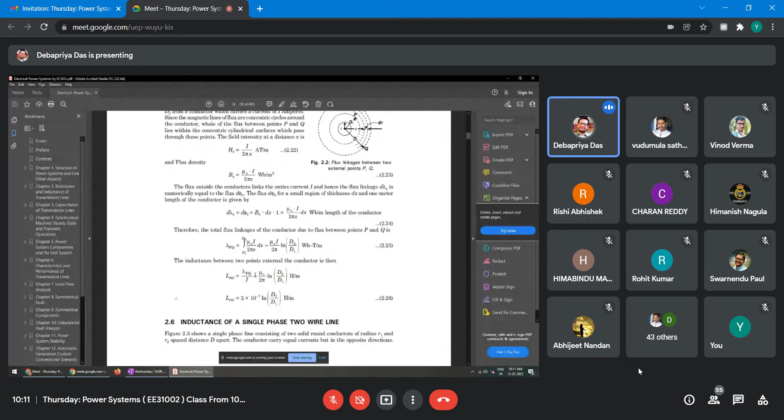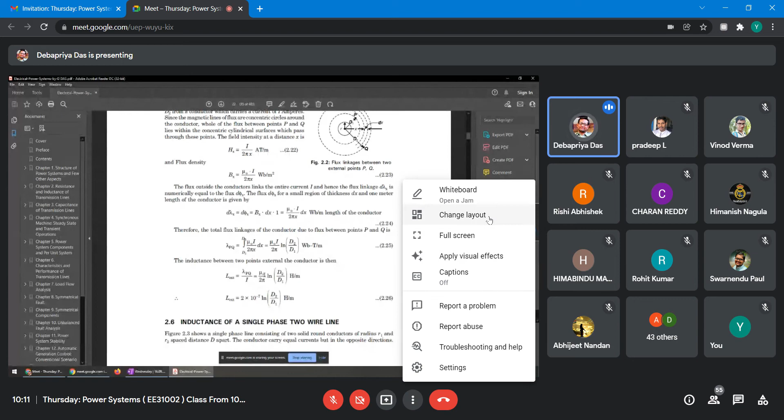Therefore, L external will be lambda PQ upon I. That will be mu 0 by 2 pi ln D2 upon D1 Henry per meter. If you put mu 0 value, 4 pi into 10 to the power minus 7 Henry per meter, then L external will be 2 into 10 to the power minus 7 ln D2 by D1 Henry per meter. So this is internal to the conductor, and this is external to the conductor.

But in this case, it depends on the distance D1 and D2. For example, if D2 is equal to D and D1 is equal to r, from the surface of the conductor, then this will become 2 into 10 to the power minus 7 ln D upon r Henry per meter, right?

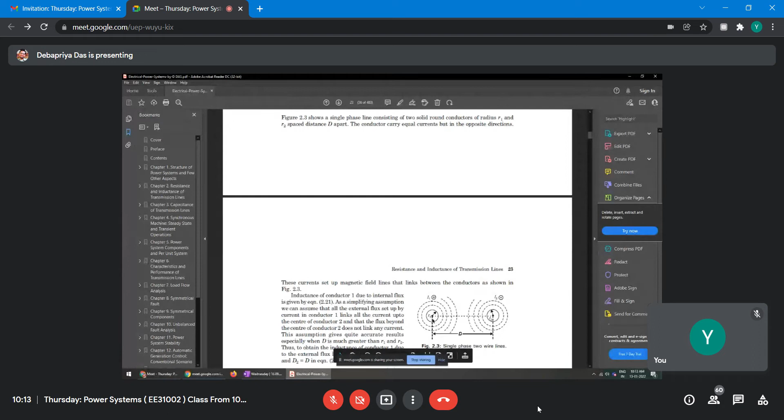So suppose you have two conductors, single phase. One is incoming, another is outgoing. This plus means the current is entering into the page, and dot means it is leaving the page. Assume that this current is I1 and this current is I2, although I1 is equal to minus I2 according to the direction, and assume the radius of this conductor is R1 and radius of this conductor is R2.

So the conductors carry equal currents but in opposite direction. So basically I1 will be minus I2 because it is a return path. If one is I1, then I2 is equal to minus I1. Now this current sets up magnetic field lines that link between the conductors as shown.

So inductance of conductor 1 due to internal flux is given by equation 2.21, that is half into 10 to the power minus 7 Henry per meter. But as a simplifying assumption, we can assume that all the external flux set up by current in conductor 1 links all the current up to the center of conductor 2.

Whatever is there, we will consider only up to the center of the conductor, not beyond that, because it is a fair assumption. If you consider beyond that, you will not get much improvement in the result, but the derivation will become different. Therefore we will consider up to the center of this conductor. Similarly, for this one, we will consider up to the center of this one, and this gives quite accurate results.

Another thing is that the center to center distance is d. So d minus r1 is approximately equal to d. Similarly, d minus r2 will be approximately equal to d, because d is much larger than r, the radius of the conductor. Therefore, if we assume d1 is equal to r and d2 is equal to d in this equation, then L1 will be 2 into 10 to the power minus 7 ln d upon r1 Henry per meter.

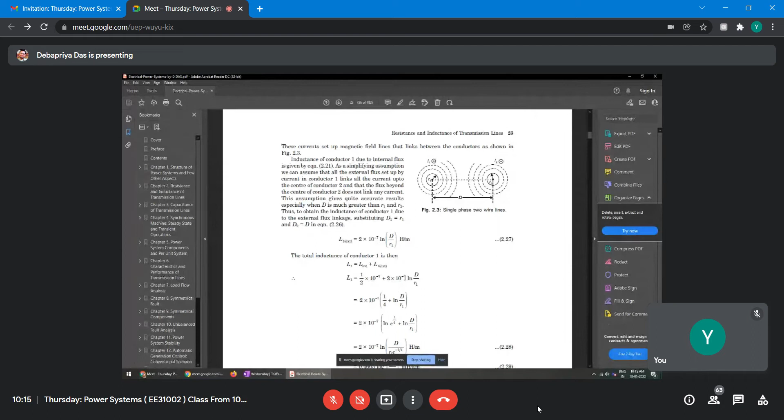Therefore, the total inductance of conductor 1 is given by the internal inductance plus the external inductance L1. Internal is half into 10 to the power minus 7, and external is 2 into 10 to the power minus 7 ln d upon r1. If you simplify, taking 2 into 10 to the power minus 7 common, in bracket it will be 1 upon 4 plus ln d upon r1. This term you can write as ln e to the power 1 upon 4 plus ln d upon r1. That means you can write 2 into 10 to the power minus 7 ln d upon r1 e to the power minus 1 upon 4 Henry per meter.

From natural log, we are converting into log base 10. Throughout this, we will use log base 10. If you convert this, you can easily do it: 0.4605 log d upon r1 dash millihenry per kilometer. Therefore, r1 dash is equal to r1 into e to the power minus 1 upon 4, that is 0.7788 r1.

So the radius r1 dash is the radius of a fictitious conductor, which has no internal inductance but has the same total inductance as the actual conductor. Therefore, when you solve numericals for calculation of inductance, if radius r is given, you will take r dash equal to 0.7788 r as the fictitious radius of the conductor, as if it has no internal inductance, but the inductance it gives includes the internal inductance. In general, r dash is equal to 0.7788 r. Similarly, for L2 it will be the same thing.

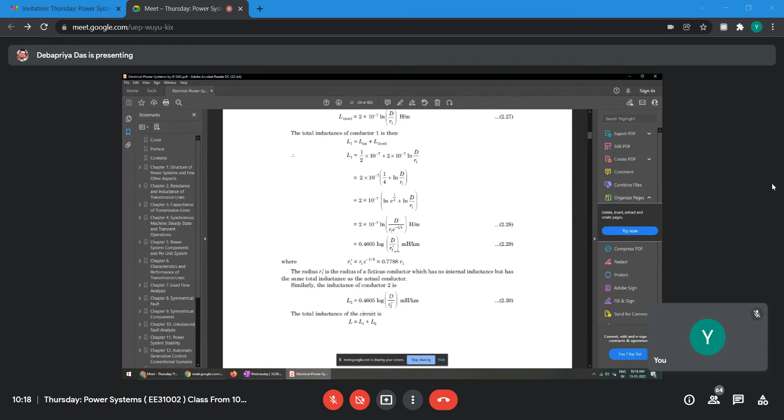So we can write L1 is equal to 0.4605 log D upon R1 dash. If the radius is the same, R1 dash is equal to R dash. So we can write L1 is equal to 0.4605 log D upon R dash. We are assuming R1 is equal to R2 is equal to R, hence R1 dash is equal to R2 dash is equal to R dash.

So this you can write as 0.4605 log 1 upon R dash plus 0.4605 log D upon 1. That means this is the inductance calculation from the radius R to 1 meter length from the center of the conductor, and this one from 1 meter to a distance D. This way these two terms have been broken, right? So this way this term, L1, is written.

Right. So from the equation it is clear that the first term is only a function of the fictitious radius of the conductor. The first term of the equation can be defined as the inductance due to both the internal flux and that external to conductor 1 up to radius 1 meter. It is 1 to R dash, meaning this one is 1 meter, right? The second term is dependent only upon the conductor spacing, and this is known as the inductance spacing factor. Instead of a single term, we have written these two terms, right?

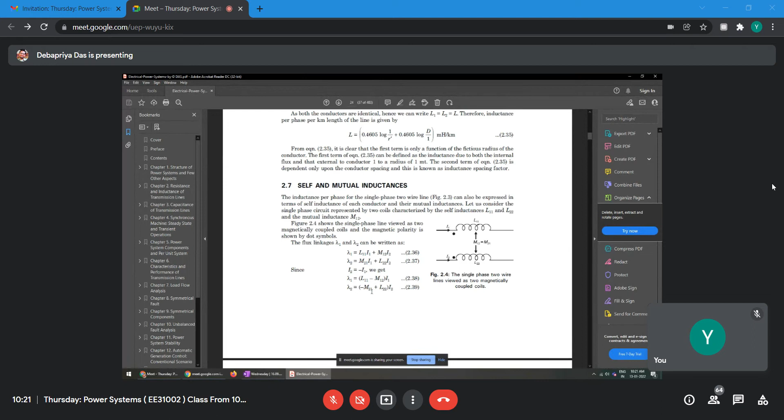so plus M12 I2. Similarly, lambda 2 is equal to L22 I2 plus M21 I1, right. Now, this current is going in and this is actually out, so I1 will be equal to minus I2. If you substitute, then lambda 1 will be L11 minus M12 times I1 and lambda 2 will be minus M21 plus L22 times I2. So one is self, another is mutual. Therefore we can write L1 will be equal to L11 minus M12 and L2 will be L22 minus M21.

Now compare equations 40 and 41 with 33 and 34. Then you will get L11 is equal to L22 is equal to 0.4605 log 1 upon R dash millihenry per kilometer, and M12 is equal to M21 is equal to 0.4605 log 1 upon D. Because here it is D upon 1, but a minus sign is there. That's why it is 1 upon D, right? So this is actually mutual inductance and this is actually self inductance, right?

The above described approach of self and mutual inductance can be extended to a group of conductors. When I was writing the book, in common textbooks you may not find this kind of expression. But after searching several books, I have cited those references at the end of this book. I saw this explanation is much better than any other textbook available, right? Because if you know only one formula, you can write everything. You will see that.

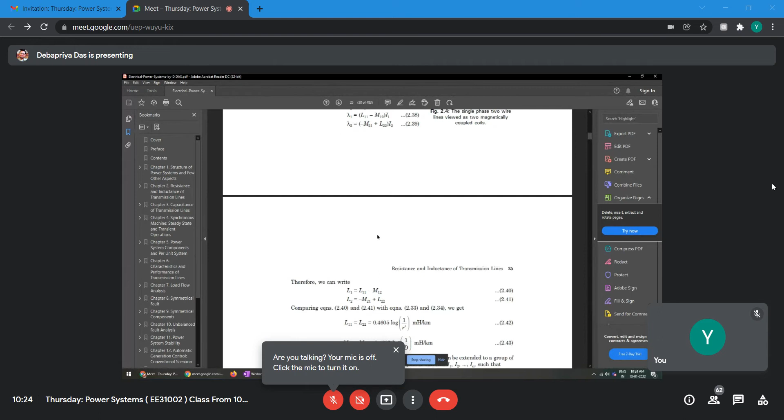In general, when we write, lambda I, that is the flux linkage of conductor I, is given by LII plus sigma j equals 1 to n, j not equal to I, Mij Ij. So this you should always keep in mind. Later when I take a three-phase circuit, those equations will be written from this one only, nothing else.

So the generalized formula for the flux linkage of a conductor can be given as lambda; we chose two conductors, but in general it will be LII plus sigma j equals 1 to n Mij Ij, j not equal to I, or whatever equations we have seen for flux linkages. Whatever you have seen here, inductance L1, L2, everything. L1 we have got this one. This is considering one conductor. This is another conductor.

But when you take the generalized flux linkages, if you consider only two conductors, you can do it and see the formula. So the flux linkages of conductor I, you can write 0.4605 II log 1 upon Ri dash plus sigma j equals 1 to n, j not equal to I, Ij log 1 upon Dij milliweber turns per kilometer. In this expression, this is actually L1 L2. But lambda is equal to LI, you know.

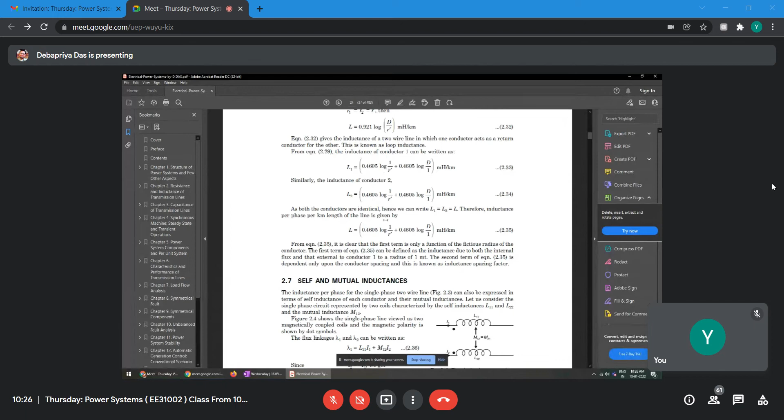So here only two terms, but for the ith conductor, flux linkages will be lambda I equals 0.4605 in bracket II log 1 upon Ri dash plus sigma j equals 1 to n, j not equal to I, Ij log 1 upon Dij milliweber turns per kilometer. This formula and this formula we need again and again. After reading several books, I got it from somewhere. In a common textbook this formula will not be there, but if you know this, you can write for any number of conductors, 3, 4, 5. Similarly, for capacitance, I'll give you another formula. There also you can directly do it.

So this is actually flux. These two equations, 2.45 and 2.46, we will be needing again and again, particularly 2.46, because when you consider a three-phase transmission line or group of conductors, this will be very useful. I will not go back to this equation, but I'll quote that from this equation we are writing.

Now, another thing is the type of conductors. You can get many good conductors, but you have to see the cost benefit analysis. Generally, for high tension transmission lines, they use ACSR conductor. ACSR means aluminum conductor, steel reinforced. The central conductor is steel, so that tensile strength will be very high, and around it the spiraling will be aluminum conductor. That is your ACSR conductor.

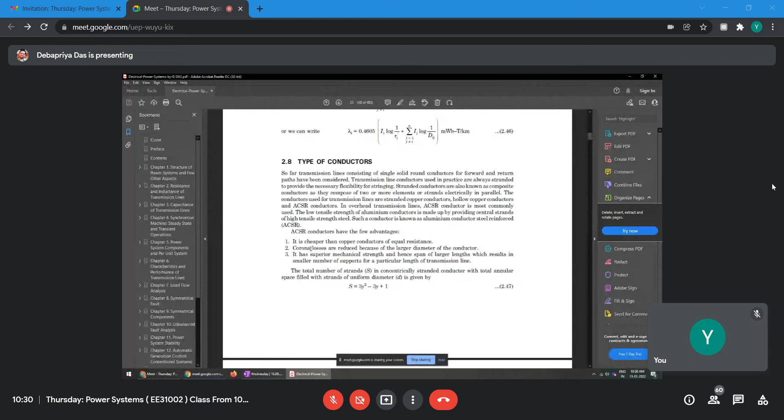So how actually will it be done? This is a central conductor, right? Here actually so many layers are there. The first layer is steel, second layer is also steel. First one is 1, second will be 6, so 7, next one will be 12, so it will be 19, and then another one will be 18, so it will be 37 and so on. So to increase the tensile strength, these will be steel strands, and these are aluminum strands.

And there is a formula: the total number of strands S in a concentrically stranded conductor with total annular space filled with strands of uniform diameter d is S = 3y² − 3y + 1. If y is 1, S is equal to 1. That means the first one. If y is equal to 2, then 12 minus 6 plus 1, so 7: around this, 6 are there. If it is 3, then 27 minus 9, 18 plus 1, 19. So this one plus this one plus this one will be 19, next one will be 37 and so on.

And the overall diameter: whatever sketch or diagram you see, it looks like the diameters are different, but let me tell you, all the diameters remain the same. The aluminum or steel strands have the same diameter; the draftsman who drew this perhaps didn't know. So overall diameter you can easily calculate. It will be (2y − 1)d, where d is the diameter of the single conductor.

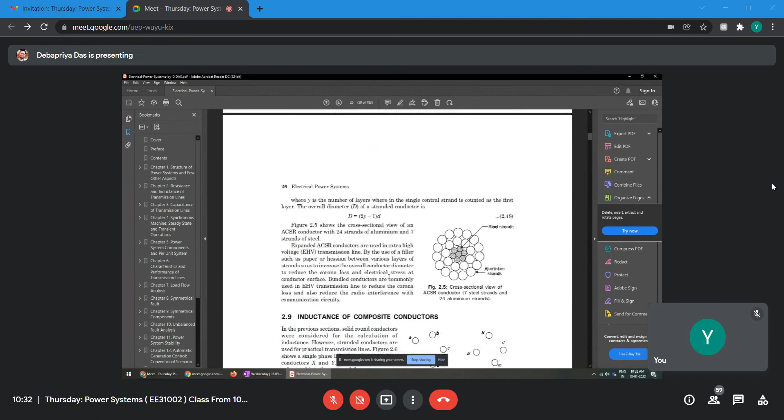And this is the formula: S = 3y² − 3y + 1, where y is the layer. If the voltage level is very high, the number of strands will be more; aluminum strands will be more. It depends on the design.

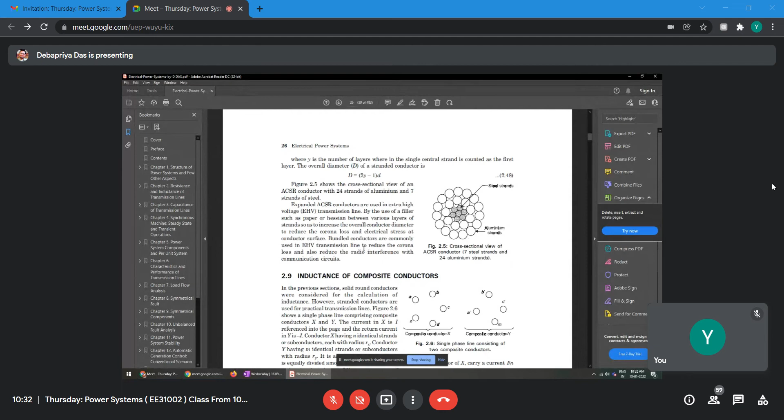And inductance of composite conductor.

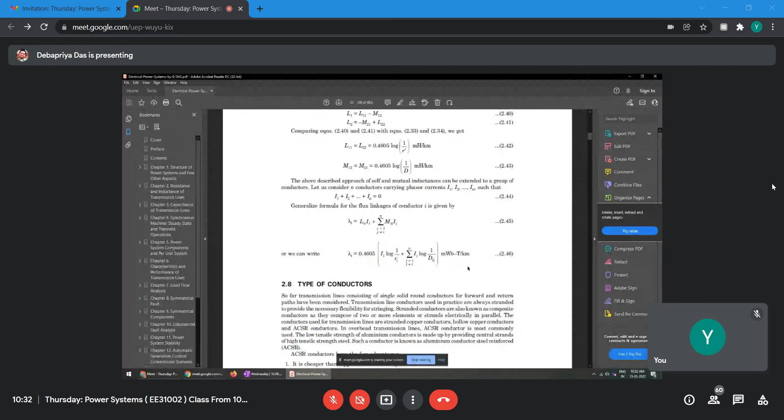So now assume a group of conductors. Suppose this is composite conductor group X. There are n conductors, a, b, c, d, up to n. This is another composite conductor group Y. Here a', b', c', up to m conductors are there. So we have to find out the flux linkage of each conductor. Now we'll go back to that equation 246. Using this formula, directly you can write.

First thing is, what you assume: these conductors are all in parallel. For example, this is conductor a, b, c, up to n. This is group X, that means they are in parallel. Similarly for the other one, it will be a', b', c' up to m. This is n and this is m, right?

They are in parallel. So if current I is entering, and you have n conductors, then each one will carry current I/n. Similarly here, if total conductors is m and the current is minus I, it will be −I/m, because one is incoming and the other is outgoing. So if I take the direction this way, in this case it will be the direction this way.

So that's why it is taken I by N. Total current is I, but each conductor is carrying I by N current, and using that formula for A, B, C, D, N, the log 1 upon Rx is taken. Rx is the radius of the conductor A, right? And assume that it is Rx dash, because fictitious radius, plus log 1 upon DAB, it is equation 246, right?

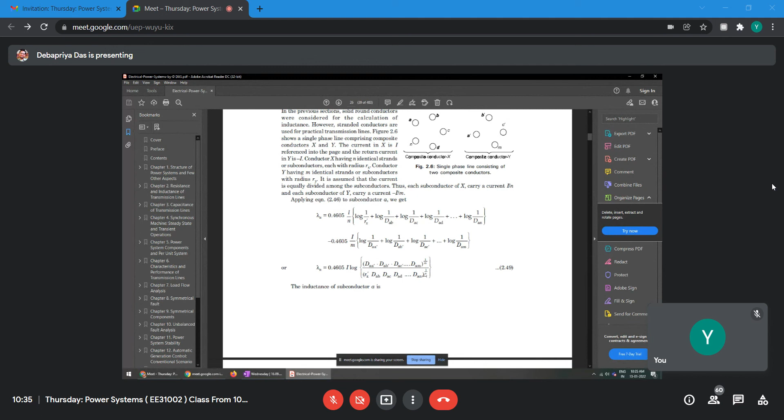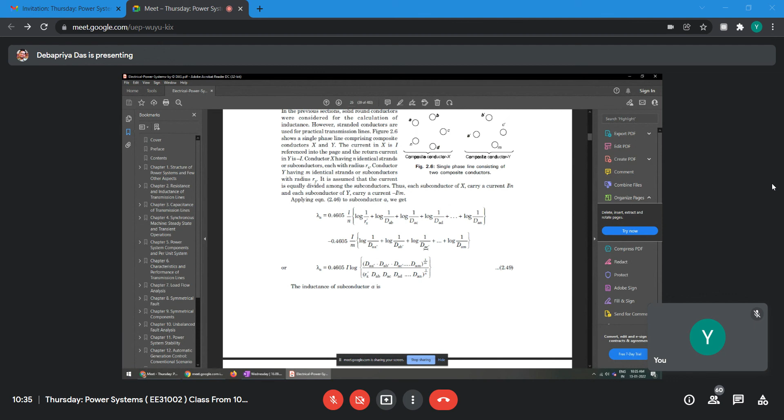Now if you simplify, then flux linkage of conductor A, I mean group A, will be 0.4605 I log. Here all the product will come to the power 1 upon M. You can simply do it, right? Because it's minus, it will go to the numerator. And here Rx dash, all the product to the power 1 upon N, will be in the denominator, right? So inductance of subconductor A will be lambda A divided by I by N, because each conductor is carrying I by N current, right?

So lambda A, because total current is I, but for each one the current is I by N, so it should be divided by I by N. I will be cancelled, N will be product here. So that's why it is 0.4605 N log of this one, right? That is LA. Now, the average inductance of any one subconductor of composite conductor X: you calculate all and divide by N. This is LA we have calculated. Similarly, LB, LC, LN, all you can compute. Then you take the average inductance, so LA plus LB plus LC up to LN divided by N.

Since conductor X is composed of n subconductors electrically in parallel, its inductance Lx will be L average upon N. Because each conductor has L average, and you have n number of conductors, it will be L average by N. So it will be basically LA plus LB plus LC up to Ln upon N square, right? So substitute all LA, LB, LC. Here only LA is shown. You have to calculate LB, LC up to LN. Here it is not shown, so you try a little bit, right?

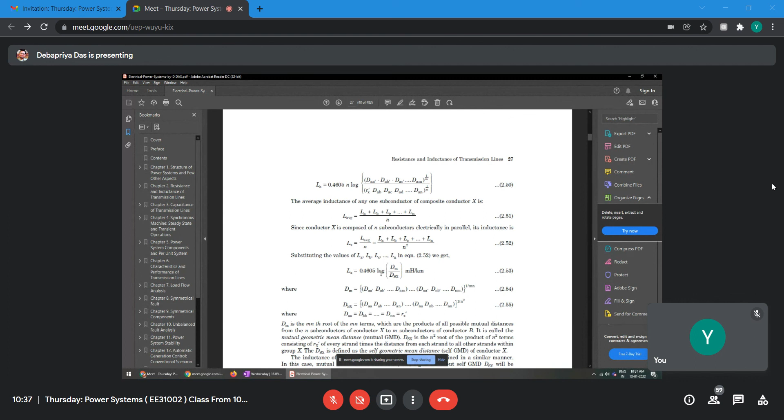If you do so, then LX will be equal to 0.4605 log Dm upon Dsx millihenry per kilometer, right? Where Dm is the product of these to the mn-th root, and Dsx is the n squared root, right? And all DAA, DBB are nothing but the fictitious radius of the conductors of group X. Try this a little bit. Later I'll take some examples, right?

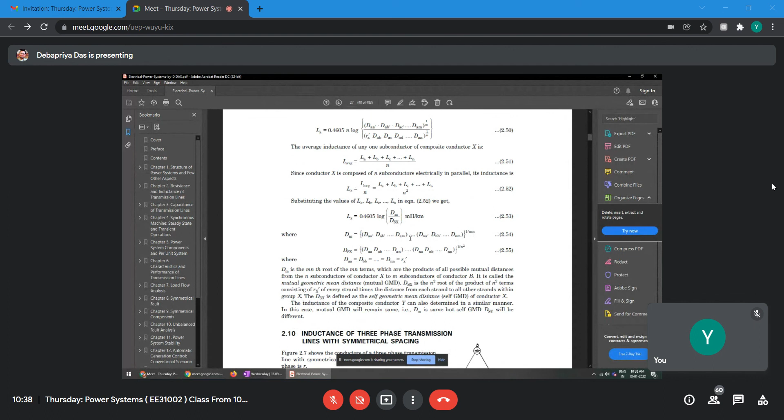Sorry. Therefore, Dm is the mn-th root, and it is called mutual GMD, because it is the distance between two groups. AA dash, AB dash, these are distances between two groups. So this is called mutual geometric mean distance, right? And here Dsx is actually the distance of the conductors within their own group. DAA, DBB are all fictitious radius, AB up to AN.

This is called self geometric mean distance, that is self GMD. And this is called mutual geometric mean distance. Mutual means distance between the two groups of conductors. And self means the distance between the conductors in one particular group. Right. So Dm upon Dsx millihenry per kilometer, right? And this way one can calculate.

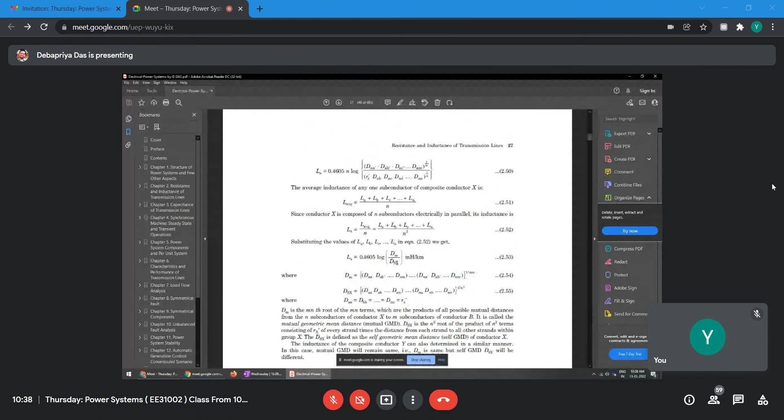So a little bit of practice is necessary, and it is there in my NPTEL online course, right? There several examples are taken, and I have used several color pens, red, yellow, blue. If you have time, because I know you have many courses, I understand that, you can also see this.